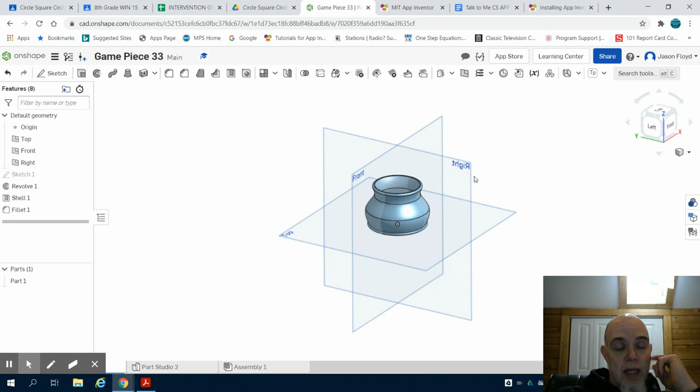In the previous video, I showed you how to create a mug handle for a standard mug. For those of you doing what's called a belly mug, the process is the same, but just a little bit more complexity with planes. So the first thing I'm going to do is I'm going to grab my plane here.

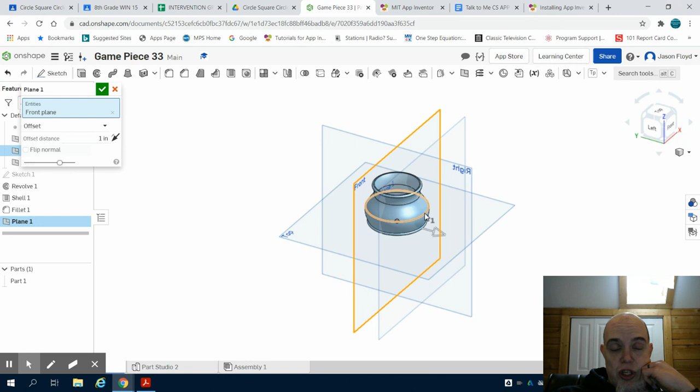I'm going to choose my front of this, and I'm going to offset the bottom here, this little ridge here. I'm going to offset that 1 inch. So I'm in line as we can take a look and see that bottom point of this. So I'm going to place a sketch on that plane 1. And I'm going to align my handle with that point. And again, this is an extremely small scale because we're dealing with a game piece here.

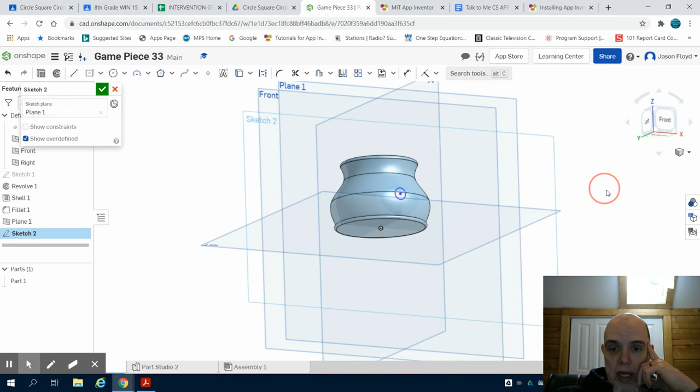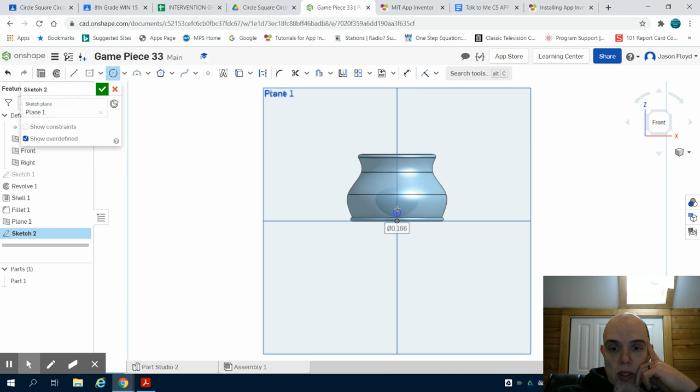Actually, I don't want to align it there. I'm going to take that sketch off. I'm going to replace that sketch on that plane 1. And I believe as I'm looking at the diagram on this, I actually want to align it a little closer to the bottom, right above here. So I'm just going to do a handle of 0.15. Scale on this, again, is really small versus the other one because this is a game piece.

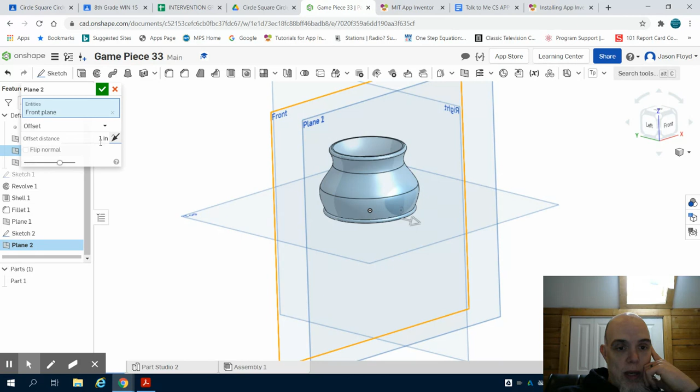So I'm going to come back to my plane. I'm going to close out this sketch, and I need to create another plane. I'm going to go to that same front plane, and this one I'm going to offset 0.8. And the way I've gotten this is just not random. I'll show you in a second. I'm going to go to plane 2 and lay my sketch down.

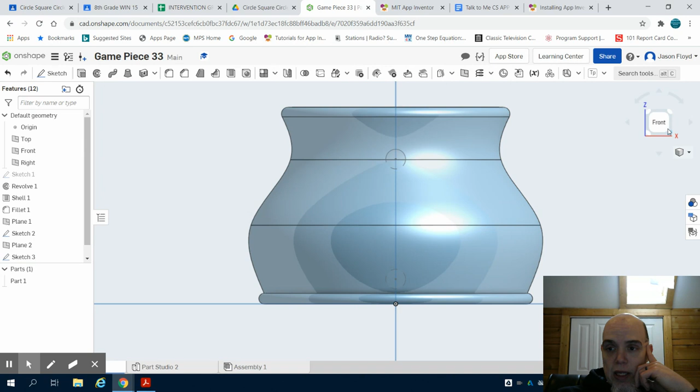I'm going to go back to that front. I'm going to grab that circle, and my handle is going to come into play right somewhere in here. And again, I'm going to go to that 0.15 and fix that. And what we'll see now is I have those two sketches there. I'm going to do the same thing now.

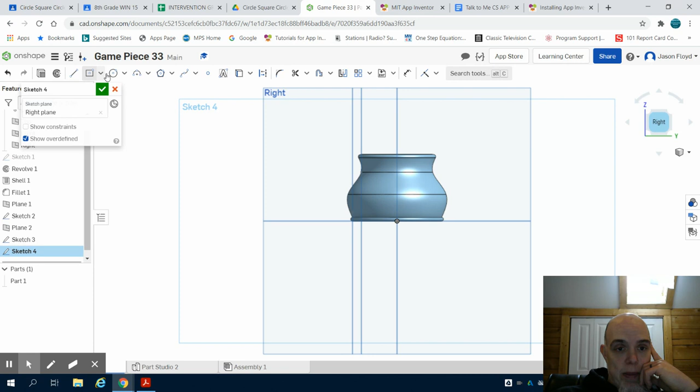I'm going to put a sketch down, and I want to put a sketch down on the intersection of this. So I want to go to the right side of this. I'm going to place that sketch there. I'm going to grab my arc tool, and I need to find that center point of that circle that I've drawn, which I hope is that, and the center point of the circle which I've drawn, which is that, and I will draw my handle.

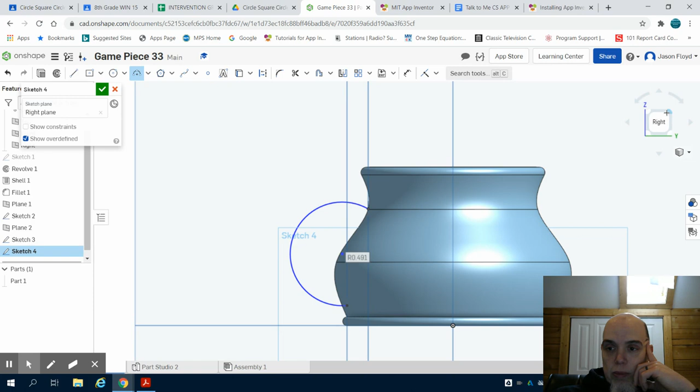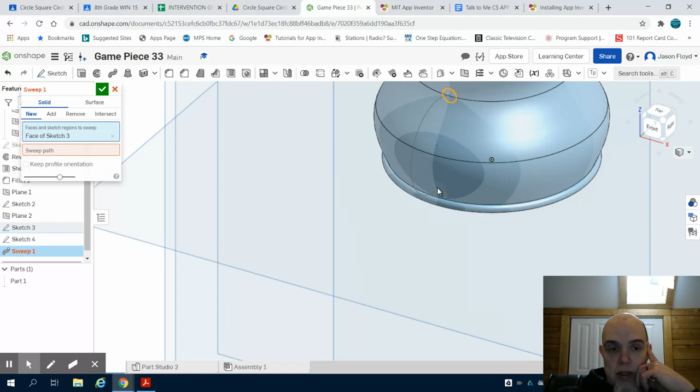Now I'm going to gain perspective, and hopefully I chose that circle there. Yes, I did. I'm going to come up here, close out this sketch, and I'm going to grab my sweep tool. I'm going to select the circular face here and the circular face here. And I need that face, and there we go. I can see it better there. There we go. And it's not selecting.

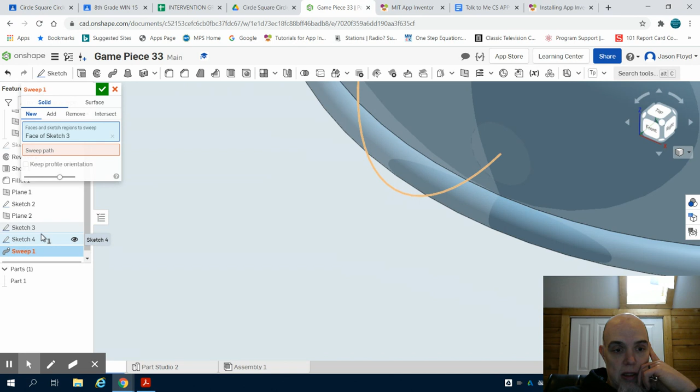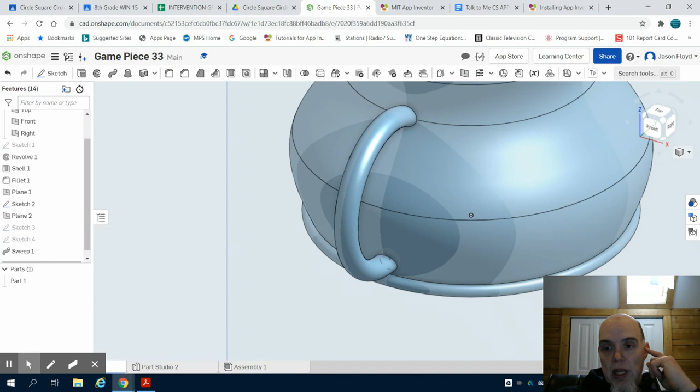I believe it's because it's not on the surface, but I'm going to see if I can go face of sketch 4 here and select that through here. It is not letting me. So as I've done that, I can come here and I can now click on my sweep path, which I'm going to say is this, the line that I've drawn. I can green check mark this, and I can see that I've created my handle for my belly mug using two surfaces that aren't equal.

To go back to my original sketch of this, to show you where I got the measurements for my plane, you can see I got the measurements for my bottom plane being 1 inch to this point because this is where I wanted to put my handle. From the top one where I got the 0.8 from, I knew at this intersection point I was going to be 0.8, which is my radius.

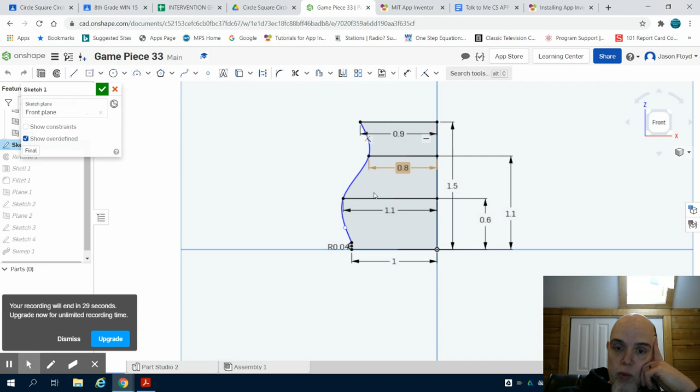So that's how I decided to put plane 1 at 1 inch and plane 2 at 0.8 inches, based off my original sketch, which then gave us a finished product. Once I found that second circle to sweep against, we can see my pot, or my belly mug handle.